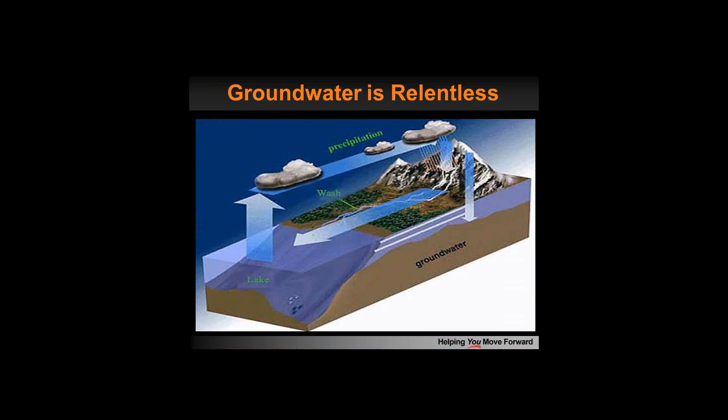Thank you, Don. As everybody knows, groundwater, or more importantly groundwater infiltration, can be very relentless. The chances of water infiltrating any project are very high, especially since there's so much water on the planet, over 326 million trillion gallons. Some of the things we face day to day are reflected in that last poll question. Safety is definitely one of the most important things on any job site, with one of the biggest threats being immediate flooding, which can cause a lot of problems.

Many times most designers will try to foresee this with pre-grouting programs for the subsurface soils or rock to achieve safe and manageable inflows, but those unforeseen events can definitely cause immediate flooding and even loss of ground.

Next issue is environmental, contaminated water or water tables. A lot of regulatory agencies require treatment of that groundwater prior to recharging it back into a stream or even back into the groundwater table. Obviously the fewer gallons pumped out of the ground, the fewer gallons treated, for fewer dollars overall.

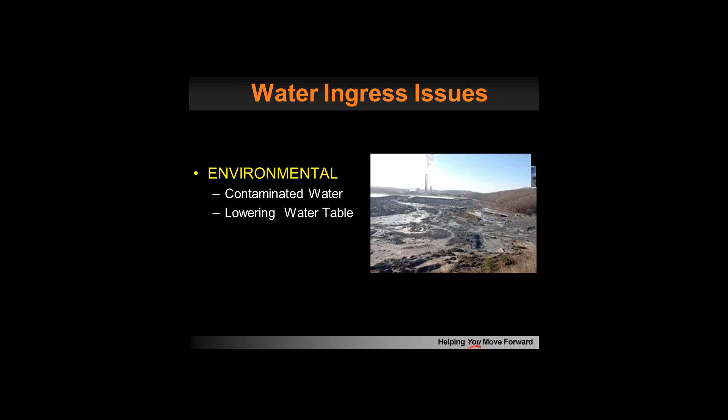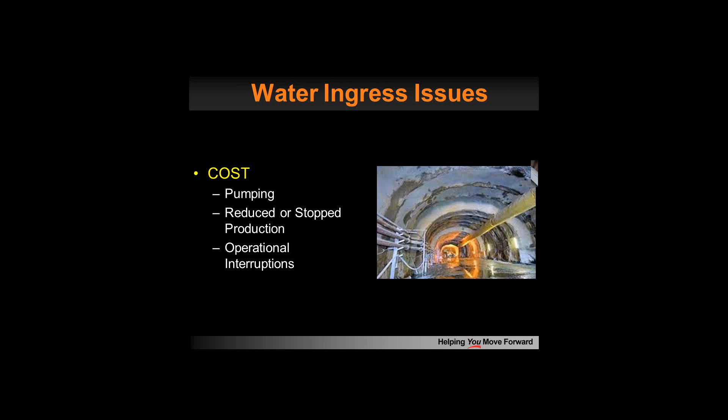Next are costs associated with pumping itself, and or reduced or stopped production and operational interruptions. If unforeseen, those types of water inflows can cause shutdown of a project and very costly remediation plans to get back up to speed. Time is money on a construction site.

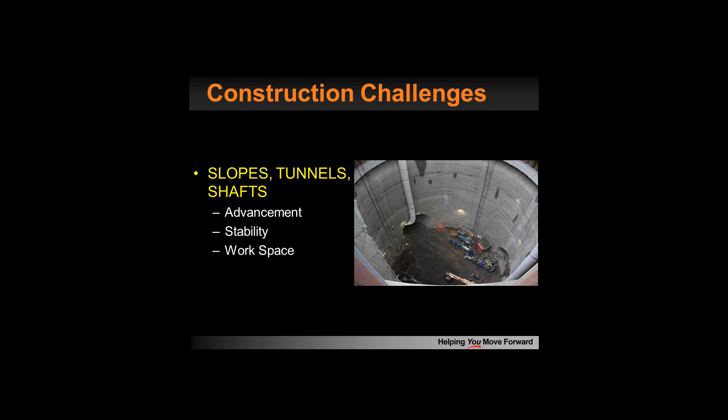Some challenges can be exacerbated by water with the advancement of a mine slope, mine shaft, or TBM. And then, of course, operating and maintenance nuances come into play with the introduction of groundwater. The incessant onslaught of groundwater over time can cause equipment issues, corrosion on tracks or associated components, and can also create worker and public safety issues with trip and slip hazards.

So in summary, to recap that poll question, which I think a lot of people touched on, groundwater can be very challenging, causing big difficulties with design, construction, and maintenance for contractors, engineers, owners, and agencies to deal with on a day-to-day basis with any underground construction project. These issues can be very costly, and everybody is well aware that millions of dollars are spent annually to try to remediate and control the inflow of groundwater in underground constructions.

But through the assistance of designers like Ward Knotts, who we have on the webinar today, with expert grouting specialists and the use of cementitious grouts, chemical grouts, and solution-type grouts, these challenges can be handled. They can be managed down to acceptable levels, and in some cases even eliminated.

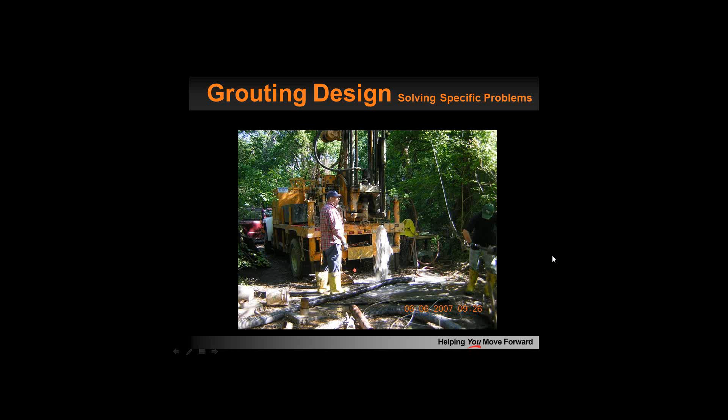And here's where the amenability theory comes into play. The amenability is a measure of the suitability for a given suspension grout to permeate fissures and apertures accessible to water in the grout zone. The amenability coefficient of a formation refers to what percentage of pores and fissures accessible by water are also accessible by grout. So it's a quick and scientific method to determine if a grouting operation is on the right course or if changes are required.

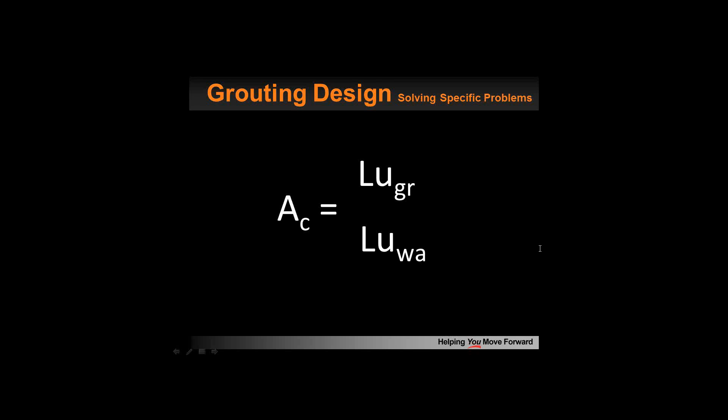Prior to injecting the grout, the permeability or Lugeon value of a formation to be grouted can be calculated by conducting what is commonly referred to as a water test, or in situ hydraulic conductivity test. To clarify, 1 Lugeon is approximately 1 × 10⁻⁵ centimeters per second. Water is used as a test fluid and injected in the zones targeted for treatment, and the total aperture size intersecting the borehole accessible to water is calculated.

During the initial stages of grouting, the Lugeon value for the same formation is determined again, but this time with grout as a test fluid, often referred to as Lu-grout. The ratio of the Lugeon values—the Lugeon value of the grout divided by the Lugeon value of water—is referred to as the amenability coefficient. This ratio effectively sets the limit of what reduction in permeability can be obtained using a particular grout in a formation.

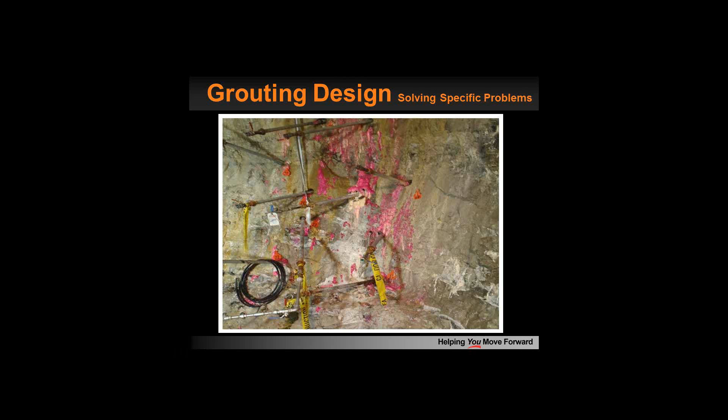In a limestone mine in Missouri, the construction of 2 sloped tunnels was temporarily halted due to significant inflows. The grouting operation was reviewed and the amenability theory was put to work. Despite very high inflows, the amenability coefficient of the formation using regular cement-based suspension grout ranged from 0.01 to 0.05, meaning only 1% to 5% of the pores accessible to water were also accessible to regular cement-based suspension grout.

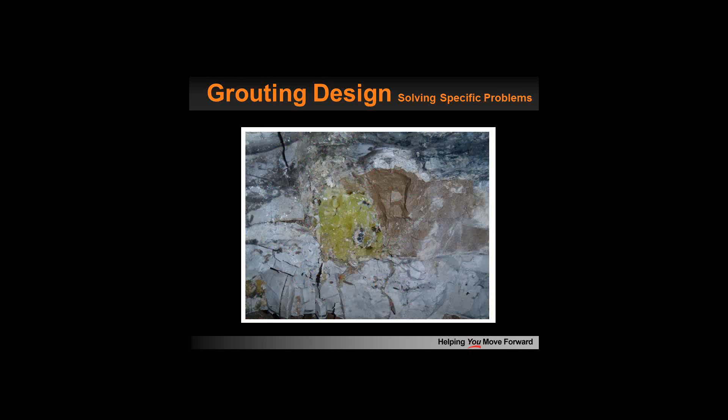The amenability coefficient of microfine cement was approximately 16%. This indicated that in this formation, conducting cement-based suspension grout operations would be a waste of time, as at best the residual permeability would still be 84% or higher. Although it seems counterintuitive given the large inflows, cement grout would be of very limited use.

Once the grouting program was switched to a predominantly solution-based grout, the inflows were brought under control. This is again the first slide, a picture of a grout hole in a mine. The outflow here was up to 600 liters per minute, about 160 gallons per minute, at a pressure of up to 900 psi. The amenability coefficient for cement-based grout was pretty much 0, meaning this formation would not accept a drop of cement-based suspension grout.

In a recent project, a TBM was launched from the bottom of a 93-foot-deep starter shaft on Fisher Island, approximately 20 meters from the Atlantic Ocean, so no shortage of water. Once the TBM broke through the secant pile wall, enough water came through and around the portal to flood the shaft and the TBM. A grouting program was designed with regular cement-based grout, and even though the grout hole spacing was extremely tight, the grout take was very poor and the residual permeability remained high.

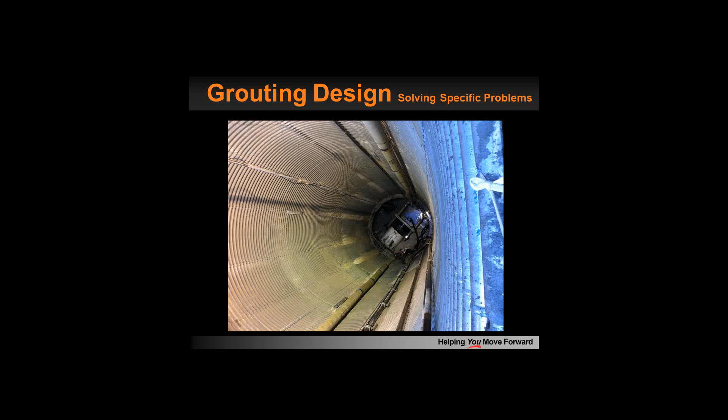The amenability coefficient was quickly calculated, and it became clear that microfine cement-based grout was required. The microfine cement-based grouting program reduced the permeability considerably, but the amenability coefficients indicated that the residual permeability and subsequent inflow would still be too high. The residual permeability was further reduced with solution grouts—grouts again with no particles.

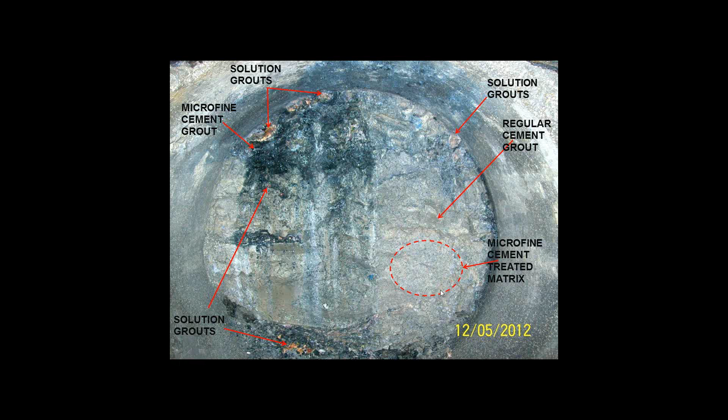I've been asked to cover some of the most common tests that can be performed, both in the field and in the lab, that help ensure a quality grout solution. Today I'll be focusing on tests geared towards cementitious grouting, which we perform here on a continuous basis in our efforts to improve our grout performance in a variety of applications.

Recently, I was privileged to see the value of these performance tests firsthand as I visited Ward and Eric and their team at Eco Grouting. Interestingly enough, very few tests have been designed specifically for the grouting industry. In fact, most of the tests used today were originally designed for the drilling industry.

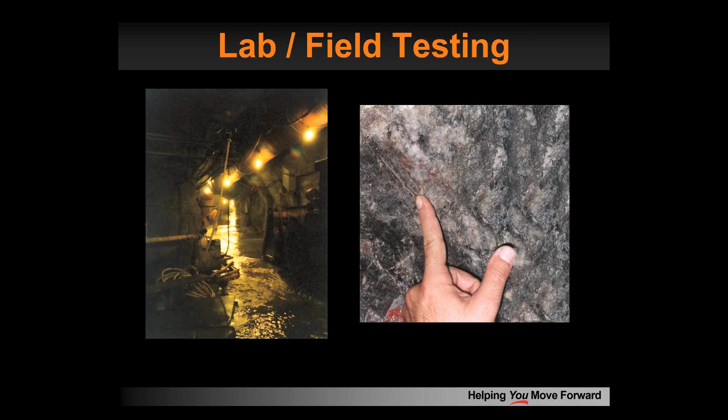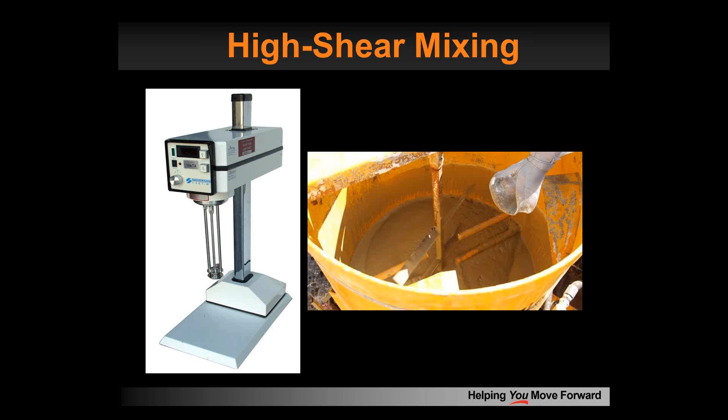Of course, the first step in evaluating a grout formulation is to correctly mix up the solution. In the lab, as well as in the field, when using an ultrafine or microfine cementitious grout, it is very important to use a high shear mixer. This shearing action helps facilitate complete wetting and dispersion of each solid particle in the grout mix. Without it, the grout solution will likely contain agglomerated clumps that impede performance.

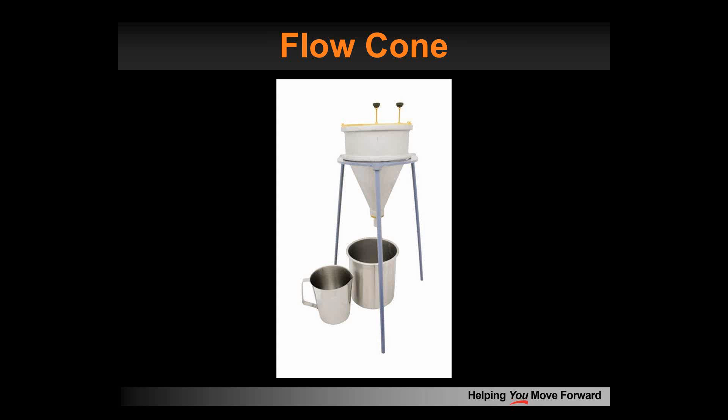After mixing, depending on the particle size of your grout, one of the first tests performed will be either the flow cone or the Marsh funnel test. Both are used to evaluate the flow properties of a solution and measure the efflux time, the time required in seconds for a given amount of solution to flow through the cone. The flow cone test is effective in measuring neat OPC grout solutions, as well as grouts containing aggregates up to a maximum particle size of 2.36 millimeters, just under 1/10 of an inch.

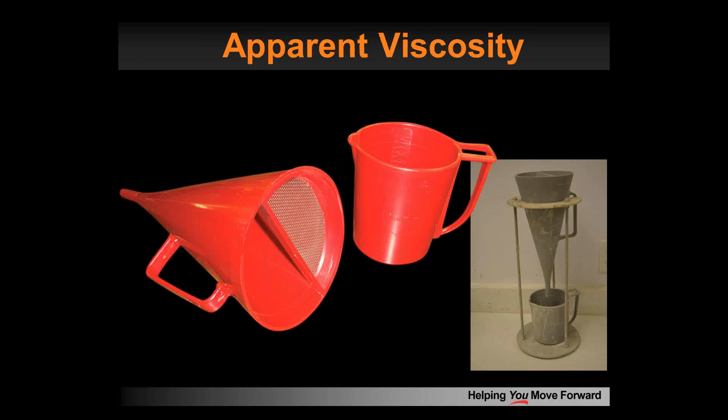The Marsh funnel test, very similar in method and reporting to the flow cone test, is better suited for the finer particles found in today's microfine and ultrafine grouts.

The Baroid mud balance is a simple device used to determine the specific gravity of a mud or grout solution. This test is extremely valuable in the lab to determine the stability of a grout, used to measure both the pre-injected grout solution as well as the reclaimed post-injected grout. In the field, it is very useful for monitoring the consistency of a grout formulation prior to injection.

Bleed in a grout solution is caused when the solids separate from the liquids. This can be very problematic, especially with higher water-cement ratios. Being able to evaluate bleed in the lab is very important when designing stable grout mixes. This test is performed by pouring the freshly mixed grout solution into a 250 milliliter graduated cylinder.

Then measuring the amount of separated bleed water at 2 and 24 hours. The results are reported as a percentile. With regards to bleed, a grout is considered stable when it has less than 5%. However, the ideal would be less than 2%.

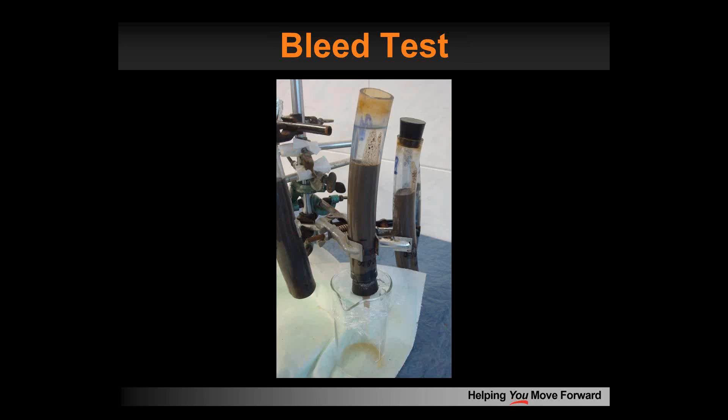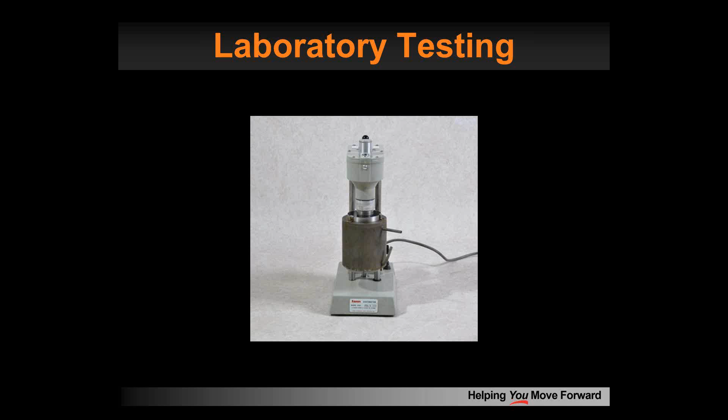Being able to quantify the cohesion, plastic viscosity, and yield point values of a grout can also be very valuable in determining how it will perform in the field. This is a fairly simple lab test where the mixed grout is tested using a viscometer, much like the one shown here.

The pressure filtration test is another important lab test used in determining the stability of a grout. Although similar to the bleed test, the pressure filtration test measures the separation of water from the grout solution under pressure.

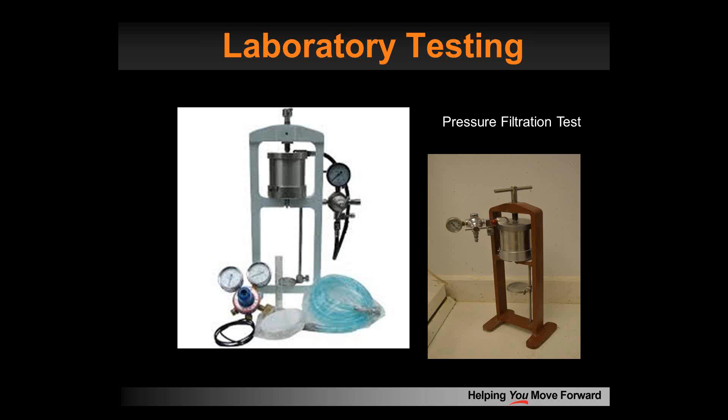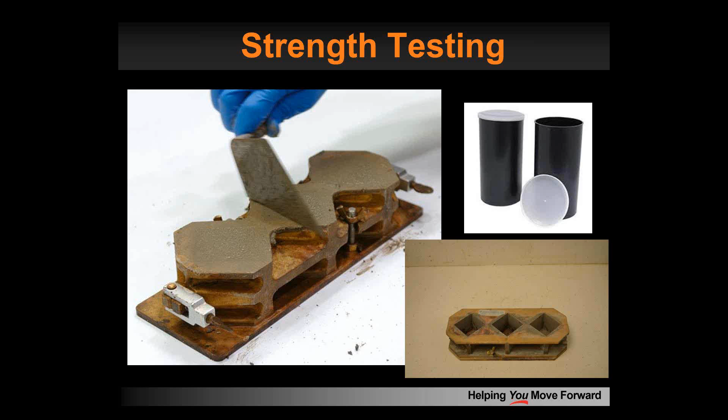In most grouting jobs, strength is of little concern as long as it is at least as great as that of the soil or rock being treated. Since most grouts do not contain aggregate of any appreciable size, test specimens are usually cast in either 2x4 cylinders or 2-inch cubes. Two variations in measuring compressive strength in grout are to measure either in the pure or neat condition, or as a grout solution injected into a soil environment.

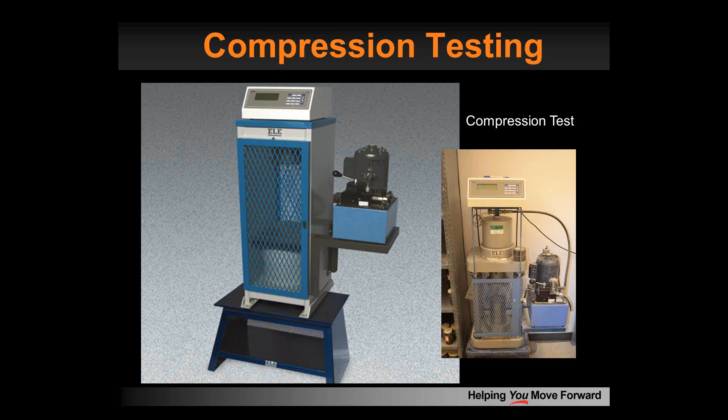In conclusion, I love this quote by Admiral Hopper: 'One accurate measurement is worth 1,000 expert opinions.' However, as valuable as these test results are, it is the correct interpretation of the results that truly benefits any grouting project. This is the real value of contracting out the services of a reputable grout consulting company like Eco-Grouting.

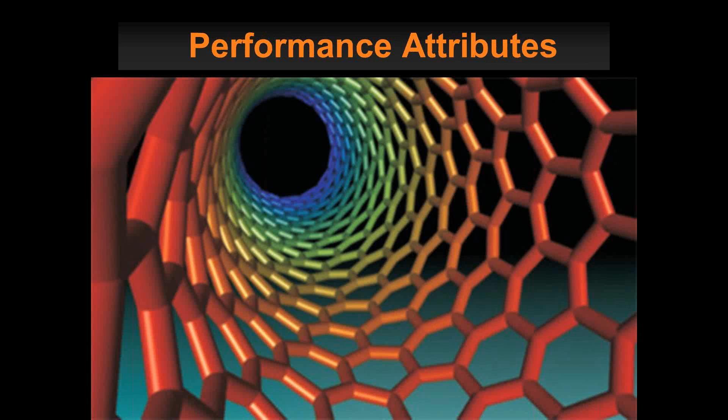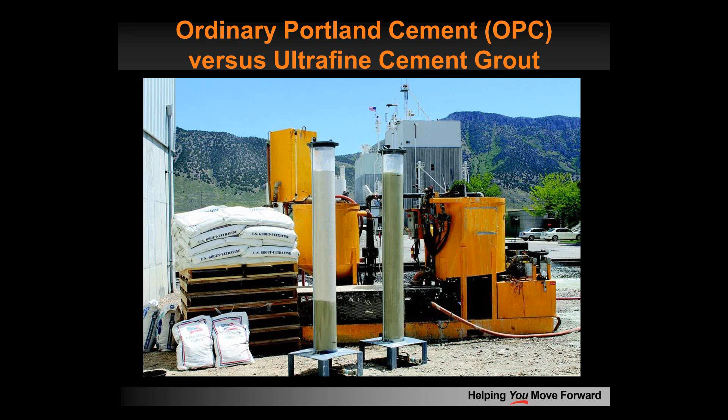As you can see, in this case, the soil conditions required a finer particle size in order to successfully permeate this sand column. As we see here, the ultrafine particle on average is 5 times smaller than standard OPC grout particle, and therefore is better able to penetrate these smaller voids.

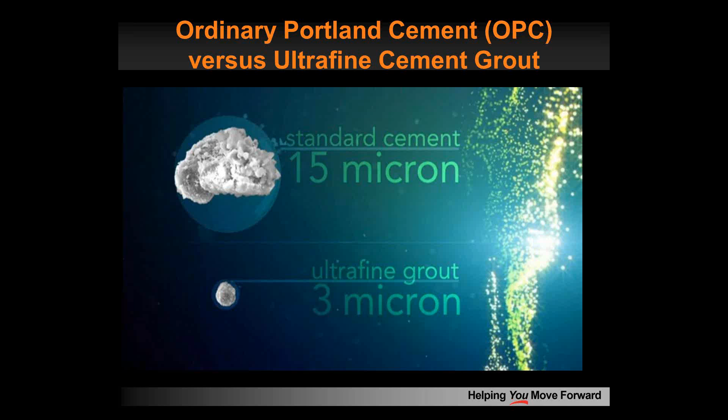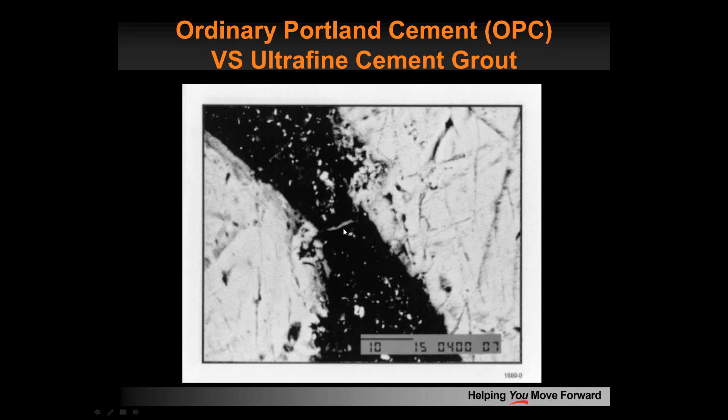This is an actual X-ray photo of ultrafine cementitious grout flowing through a 7.9 micron opening right there. To put this in perspective, the average human hair has a diameter of right around 80 microns. So the constriction you see in this photo is approximately 10 times smaller than the average human hair. Wow. Another factor in the ability of a grout to effectively penetrate, whether the application is geotechnical or structural, has to do with viscosity and flowability.

Contrary to general public's understanding, the two are not always synonymous. A liquid's ability to flow does not always correlate with its viscosity. Viscosity can be defined as a liquid's thickness, which does not always correlate with a liquid's ability to flow.

Rheology is the study of the flow of matter. And although there is most certainly a relationship between viscosity and flow, they are not always exactly the same. Here's a simple example that we did here not too long ago. We took an ordinary glass of tap water, ran it through the standard marsh funnel test. The resulting time was 28 seconds. We then added a common household rinsing agent, effectively reducing the surface tension of the water, and reran the test.

This same amount of fluid ran through the funnel in 26.5 seconds. Although the viscosity remained exactly the same, the water's ability to flow was increased by 5%. This becomes a key factor in grouting applications and emphasizes the importance of selecting the correct admixtures for your specific project.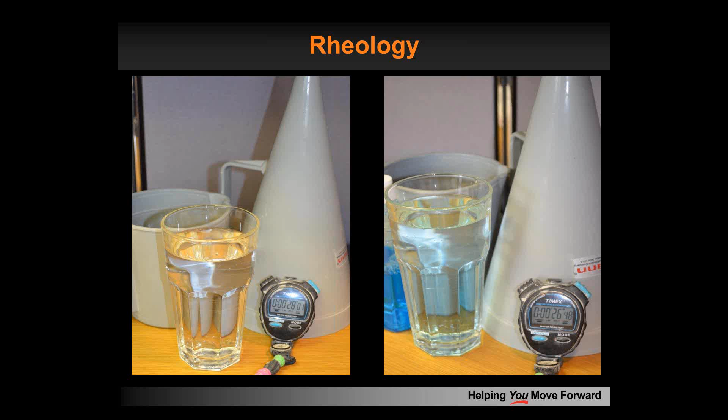Let's talk for a minute now about grout composition. Although there are various types of cementitious grouts, most consist of a mixture of a Portland or other type of cement and other various types of supplemental cementitious materials known as pozzolans.

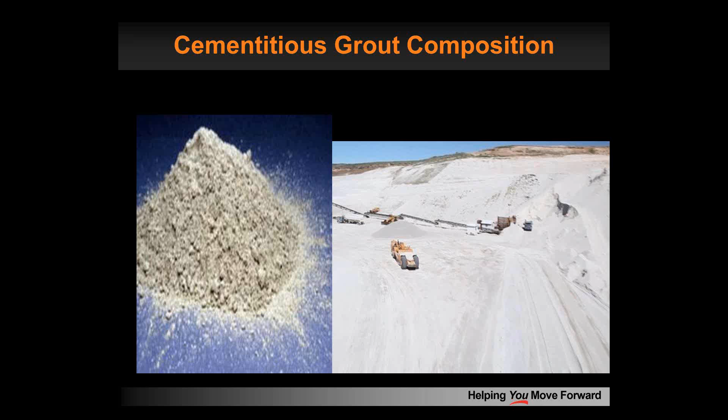Well, what is a pozzolan? The value of having a pozzolan in a cementitious grout is significant. The long-term strength and durability of any cementitious product is derived from the calcium silicate hydrate that is formed as a reaction between Portland cement and water. The more cement that you can get to convert to CSH, the stronger and more durable your cementitious product will be. Without pozzolan, only about 75% of the Portland cement makes this conversion. The remainder is converted to calcium hydroxide, which does not add to the strength, but can actually be detrimental to the final product.

Pozzolans in and of themselves are not cementitious. However, because of their high amorphous silica content, when they are finely ground and added to cement and water, they produce an important chemical reaction which converts the leftover calcium hydroxide to the desired CSH, thereby strengthening the cement and reducing the negative effects of the calcium hydroxide. This CSH conversion process can continue for decades.

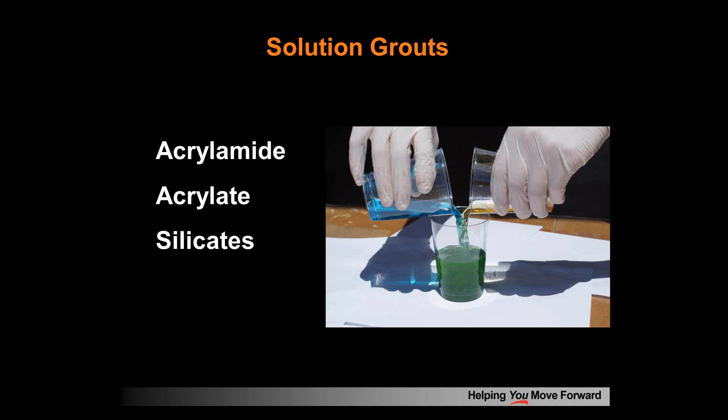Acrylamides and acrylates are generally used for more permanent water control, with lifespans of 360 plus years and 50 years respectively, while sodium silicates are considered for temporary water control and soil stabilization with a functional lifespan of only a few years. With regards to viscosity, acrylamides are in the range of 1 to 2 centipoise, while acrylates are slightly thicker at 3 to 4 centipoise, and sodium silicates typically range in the 5 to 7 centipoise.

Most acrylates and sodium silicates have set times that range from a few seconds upwards to an hour. In contrast, Avanti's acrylamide and acrylate grouts have the ability to control set times from a few seconds to nearly 10 hours. That brings us to the end of my portion of the presentation. I'll be glad to turn the time back over to Ward to discuss a few injection techniques.

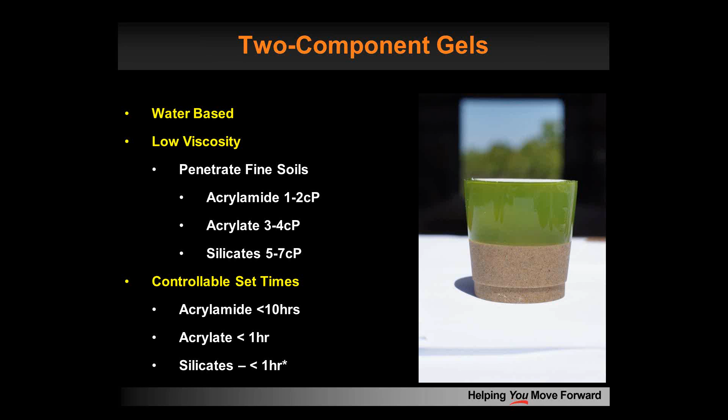Typically, in rock grouting, a borehole is drilled to a certain elevation or location, and in a good percentage of the cases, the rock is of sufficient quality that the borehole remains open. Sometimes the borehole is subjected to a variety of borehole preparation procedures to clean the borehole from debris and to ensure intersected fissures and pores are accessible to grout.

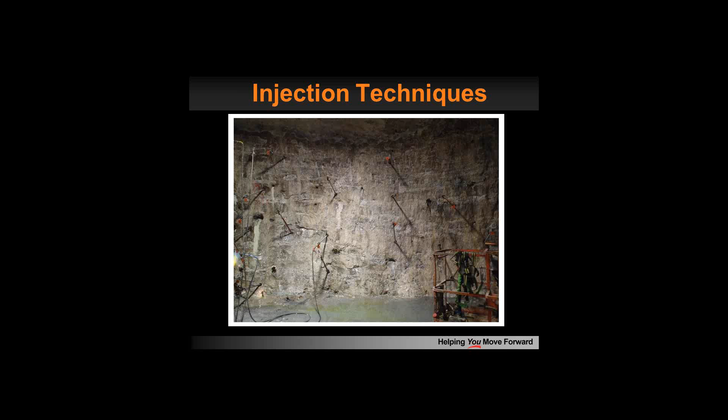The borehole may receive an in situ hydraulic conductivity test or water test and is subsequently grouted. Typically, this is the end of the history of that particular borehole. Indeed, sometimes the borehole is partially re-drilled to a deeper elevation and re-grouted, but typically a borehole in rock grouting receives one grouting pass. In soil grouting, a borehole is drilled to depth and equipped with a sleeve pipe, also

It's a pipe equipped with ports, which are typically small holes or slits that are covered with sleeves. The sleeves are made of rubber and act as one-way valves. The ports are spaced at regular intervals, and the grout is delivered in the pipe via a single or double packer. The sleeve pipe allows practitioners to inject the grout at specific locations in the subsurface, and the pipe is re-injectable.

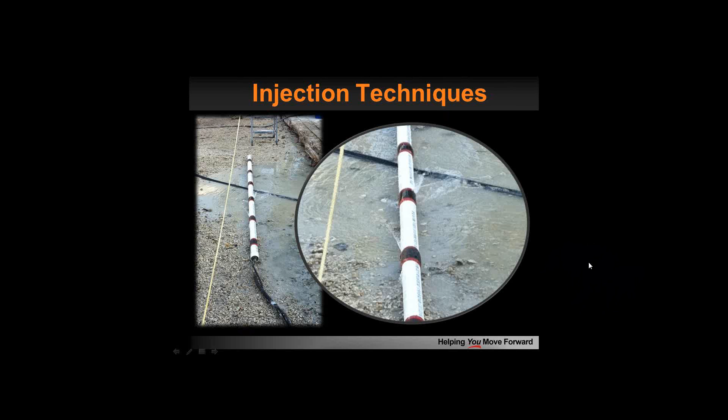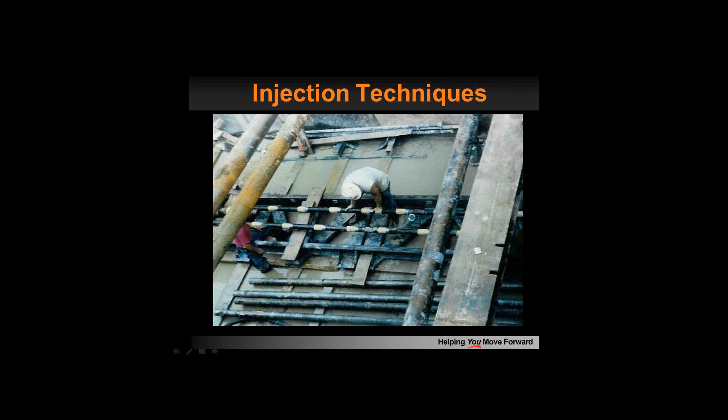The key to success in virtually any soil grouting is that the strata targeted for treatment needs to be injected multiple times. The formation in this slide was subjected to several grouting passes to facilitate construction of a tunnel. The tunnel trajectory traversed through rock for the entire section, with the notable exception of this section in the slide, where the rock dipped and was absent. So the soils through which the TBM had to mine were grouted and consolidated prior to any tunneling operation - a kind of pre-excavation grouting program.

Initially, the zones that are the most pervious during the first grouting pass will be the least pervious during subsequent grouting passes. By injecting soils multiple times, solid grout columns can be created. And when the columns overlap one another, a grouted conglomerate can be created.

In addition to different grouting delivery mechanisms in rock versus soil grouting, the grout formulations may also differ in rheology. And naturally, refusal criteria for a grouting pass in rock will differ from a grouting pass in soil. In rock, it's typically recommended to grout to absolute refusal and sometimes maintain pressure on the grout hole for a certain period of time or until grout has reached a certain stage of gelation. In soil grouting, often there is a volume refusal criteria for a particular grouting pass. These are just some of the many differences between rock grouting and soil grouting.

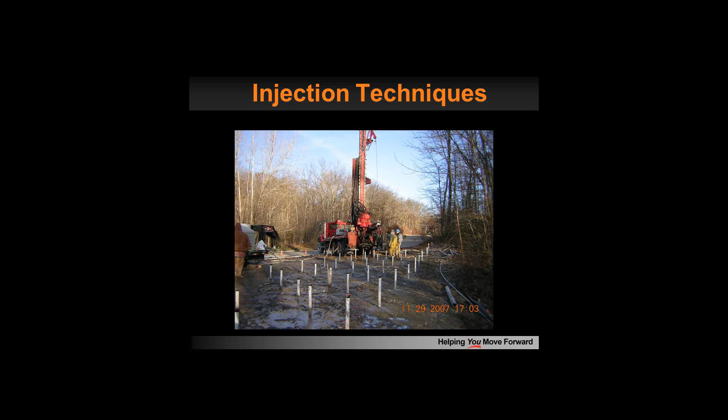And with this, I'm going to pass it back to Britt.

Britt, you could be on mute. Thank you, Ward. There you go. I'd like to start - I should be off mute now.

There we go. I'd like to dive into some case studies where both microfine cements or ultrafine cements and solution grouts were used in mining, tunneling, and subway type applications. To begin, a couple of notable projects where cements or ultrafine cements were used.

Notre Dame Stadium and Rose Bowl - tunnel accesses into both of these structures were stabilized using cementitious grouts. Good, successful projects in that application into soils and rock.

Next project is WIPP, the Waste Isolation Pilot Plant, where cementitious grouts are used to seal water inflows for the disposal and storage of hazardous waste at depth within sedimentary bedrock type formations.

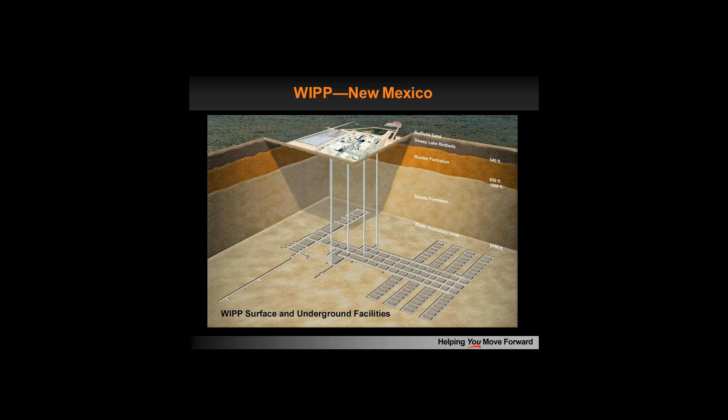Next project is Hollywood Tunnel out in LA. Cementitious grouts were used here to help re-level it in order to reestablish the tunnel alignment.

Another project - one that Ward has already alluded to - a limestone project where water infiltration was a challenge. They used a solution grout in this situation to help advance this mine slope because of the poor amenability of both Portland and microfine cement in that scenario.

Next project is Lake Mead. This is one of the intakes where cementitious grouts or ultrafine cements were used to seal high pressure waters into the rock fractures, sealing them off from the inflow into the intake tunnel. Very high pressures in that situation, and they were very successful in achieving a high reduction in water inflows.

Another project - a salt mine. As everybody knows, salts are highly dissolvable by water and can be very dangerous. Water inflows into these situations can quickly and rapidly flood the mine or cause dissolution of the salt itself. Cementitious grouts are used in salt mine type applications pretty extensively in order to help control water in that situation.

Tunnel boring machine project in Houston. In this situation, they anticipated homogeneous material throughout the entire TBM alignment, but what they encountered was a softer zone above as the TBM progressed, causing the TBM to pitch up. They came in and reinforced, or chemically grouted, that weaker zone, allowing the TBM to have enough resistance and maintain alignment. That project finished successfully - it was a sanitary sewer force main, or gravity main.

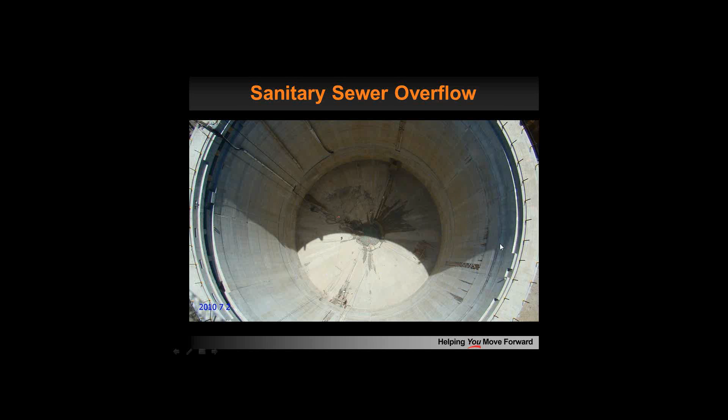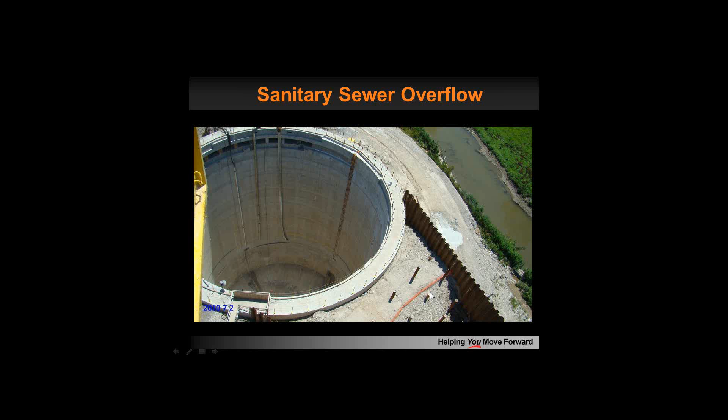Another project, not necessarily a shaft for a mine or a TBM, but very similar to a shaft type construction - this sanitary sewer overflow is 150 feet deep by roughly 150 feet in diameter. Here, both cementitious grouts and a solution grout were used to seal off water inflows that would not have allowed this construction to occur had the water not been controlled prior to the start of construction. Here you can see some of the leftover standpipes that were part of the construction that circled around the shaft.

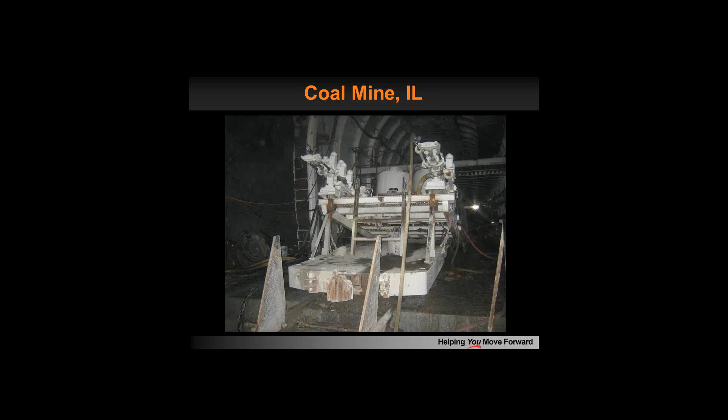Coal mine in Illinois. Again, another project where both cementitious grouts and a solution grout were used in sedimentary bedrock type formations. They were able to pump both grouts over long distances and use the cementitious grouts into the fractures of the bedrock, and then use the solution grout in the matrix type geology that occurred within those mine slope advancements.

Another project that's very notable is the Toronto TTC, or Toronto Transit Commission. They've been pumping a solution grout, encapsulating their subway systems and controlling groundwater for over 15 years successfully, and they actually have their own internal team that has been doing that for 15 or 16 years now, and it's still ongoing. Many miles of existing subway with many more miles being installed, and the need for water control in that situation. Very successful. Don, I'll pass it on to you now.

And I'll take that pass. Thank you.

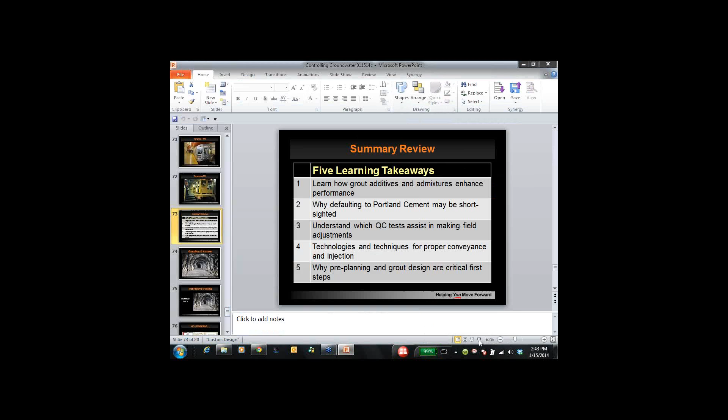Permit me to highlight something Avanti deems important. In the announcements leading up to this event, we itemized 5 takeaways that you would yield from this presentation, and above all else, we need to make certain we deliver on this promise. We learned how grout additives and admixtures enhance performance. From Brian, we learned why defaulting into Portland cement may be short-sighted. We now understand which QC test assists in making field adjustments. Ward showed us technologies and techniques for proper conveyance and injection, and we discussed why pre-planning and grout design are critical first steps, a core value of eco-grout specialists.

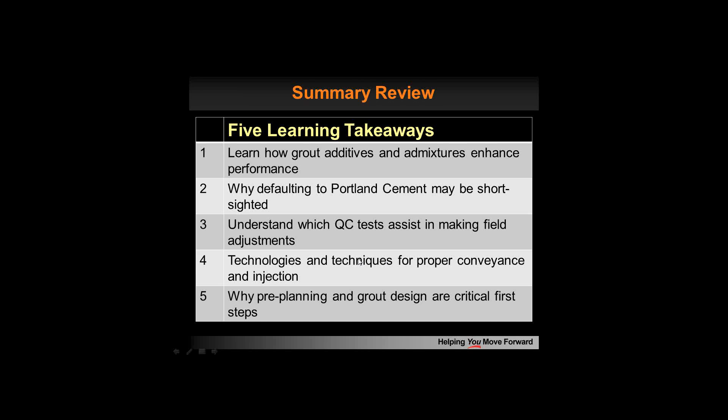I'd like to open this thing up now to a question and answer, and I have a plethora of questions, a few of which are very interesting here. What rule of thumb do you use for penetration of fractures? I have always heard that a fracture must be 6 times the size of the largest grout particle. Does that theory hold up to your beliefs?

Let's say, Ward, I'll let you respond to that. I think obviously you can't force a ping pong ball through the eye of the needle, but essentially if the fracture is smaller than the particle size of the grout, it's not going to go through. But I don't think it needs to be 6 times larger, as long as for solution grout there are no particles, so they will go through it. And for particles, I think typically we look at the D90 and the D10 of it for it to go through. But yeah, if the particle size in the grout is larger, it will definitely not go through any pore or fissure. But I don't think it needs to be 6 times.